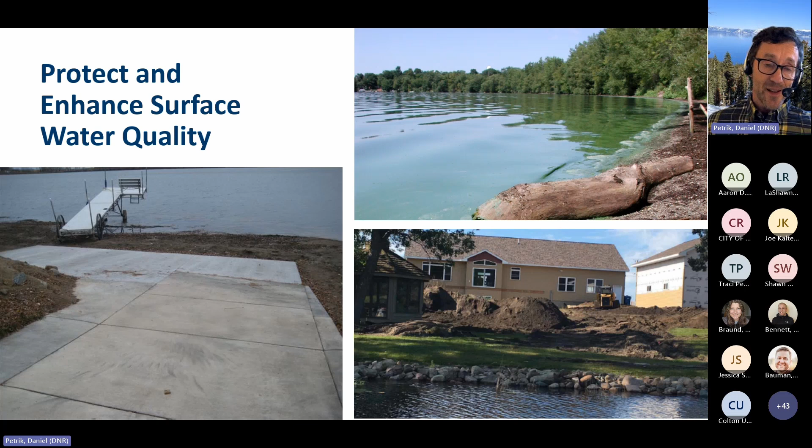Another key purpose for the Act was the preservation of economic values. Property values can vary tremendously depending on a variety of things such as density, construction quality, neighborhood character, and other qualities unique to a property's location.

The shoreland minimum lot size standards were designed to maintain property values consistent with typical urban and rural residential standards and to prevent very high density that would both degrade lake shores and ultimately property values.

Also, keeping structures and septic systems away from bluffs and rivers is especially important in parts of the state with highly erodible soils and meandering rivers, as we can see here. A key part of preserving economic values as well as public safety, especially with increasing amounts of extreme rainfall events, is keeping structures away from the water.

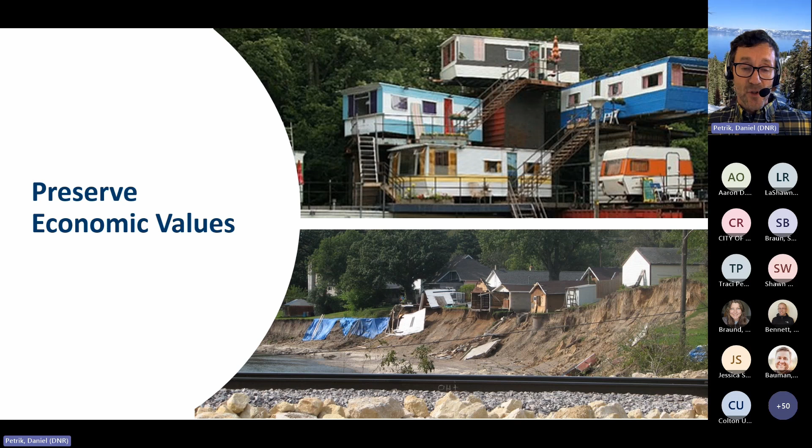I just want to note though that the minimum structure and bluff setback standards that were developed in the 1989 rules didn't consider the extreme rain events and river movements that we're seeing today. So communities should proactively look at these standards for relevance in their community, and many communities have adopted more strict standards to protect properties from these risks.

Shoreland standards for lot area, structure setback, impervious surface, and land alteration all work together to minimize the movement of sediment and phosphorus into lakes, preserving both economic and water quality values. There's growing evidence that water quality affects property values, at least in rural areas. A Bemidji State study showed that a 3-foot decrease in water clarity leads to a 22% decline in property value. So there's some real strong economic merit to protecting water quality.

And finally, the last goal of the 1969 Act is the preservation of natural environmental values and the wise use of water. This is a balancing act between unfettered development and development that sustains clean water, habitat, and scenic value—a balancing act state regulators often refer to.

This is a difficult task, but one important concept here is scenic character. While this concept can vary from person to person and across the state, and is difficult to define, most people know it when we lose it. It's sometimes hard to know when you're losing it because it happens in slow, incremental steps, and it's often hard to detect. But once we lose it, it's impossible to get it back.

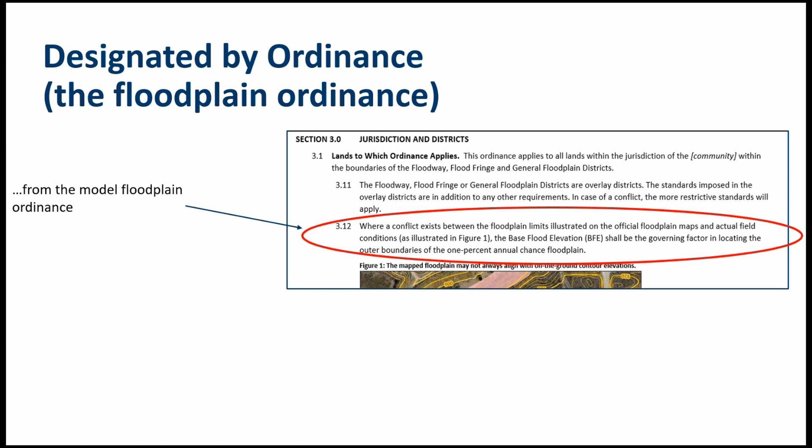The language in a floodplain ordinance that the shoreland definition refers to often looks like this phrase from the floodplain model ordinance. Here, the language states that if there's a conflict between the floodplain maps and the location of the base flood elevation, or BFE, based on field conditions, the BFE is the governing factor in locating the floodplain boundaries. This is an important issue for communities still working with old, inaccurate floodplain maps. In these situations, the geographic reach of the floodplain ordinance actually follows the 100-year floodplain elevation rather than what's shown on the map. This illustrates the issue.

In this area, we only have a piece of land that's partially in the shoreland district, as you can see from the 300-foot buffer from the creek in the lower part of this photo. This area isn't in the mapped floodplain, but most of it is in the floodplain because it's below the 100-year flood elevation and hydrologically connected to the stream. You can see this blue pipe that goes underneath the road connecting the stream to this low-lying piece of land. So the boundaries of the shoreland district don't necessarily stop at 300 feet from the creek - it includes all this area in light blue, and in this area shoreland standards would apply for any development.

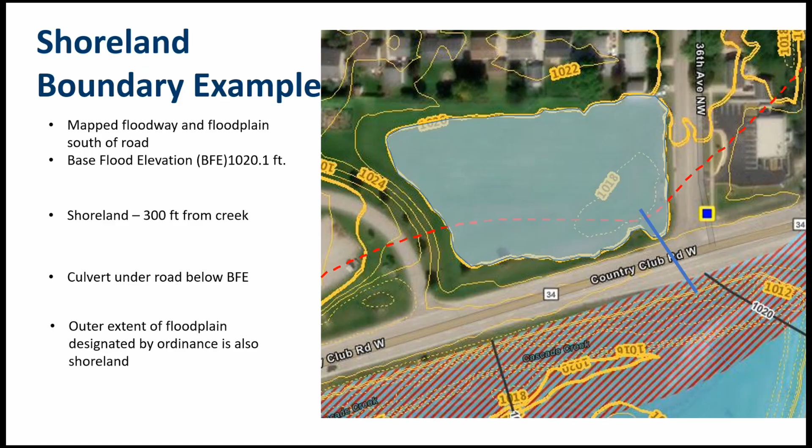Moving on, another important element in shoreland regulations is the idea of water body classifications. All public water lakes and streams are classified, and that classification determines key development standards such as minimum lot size and width or setback standards. A key concept here is that bigger and deeper lakes and rivers can better sustain human impacts of runoff, sedimentation, and nutrient loading.

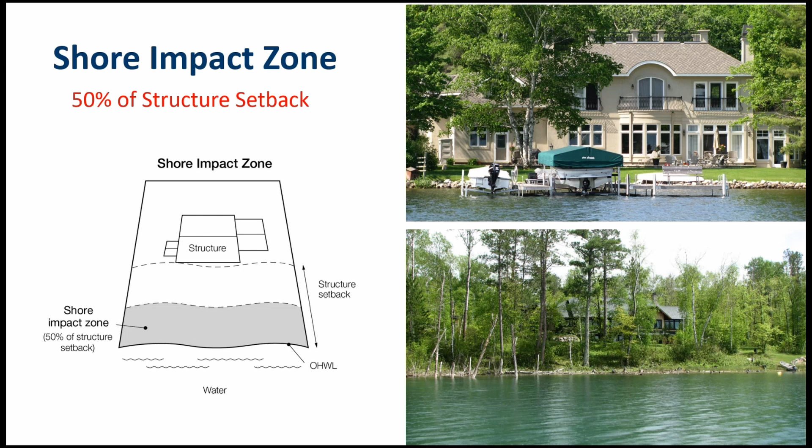The last two slides in this section cover the two most sensitive shoreland areas. Shore impact zone, or SIZ, is the first. The shore impact zone is always 50% of the structure setback, so it can vary depending on the lake or river classification. You can think of it as a buffer zone that should be kept natural to provide room for vegetation, natural stormwater management, habitat, and to preserve lake character. This works to keep most development activity away from the shore to help reduce the risk of erosion.

The bluff impact zone is the other area where intensive vegetation removal is prohibited and where a permit is required for land alteration of more than 10 cubic yards. You can think of it as a bluff plus a 20-foot buffer along the top of the bluff. It's a little of an odd concept, but it's not only the bluff itself, but 20 feet from the top of the bluff.

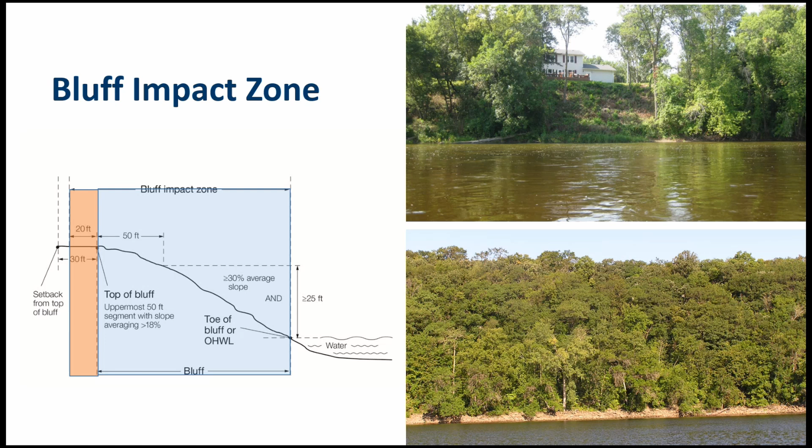Let's move on and talk about some key standards in all shoreland ordinances. As mentioned earlier, these standards vary with water body classification. These tables from our model ordinance simply illustrate the wide variety of permutations you can have based on classification, represented by different colors, also by whether there is a sewer or septic system used on the site, and whether the lot is riparian or non-riparian.

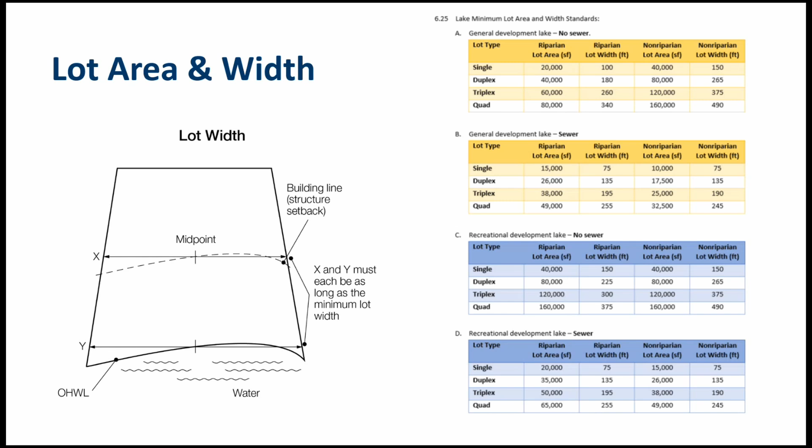So just to show you the range that can be expected: a single family home on a riparian lot connected to a city sewer system, the minimum lot size could range anywhere from 15,000 square feet on a general development lake to 40,000 square feet on a very sensitive natural environment lake.

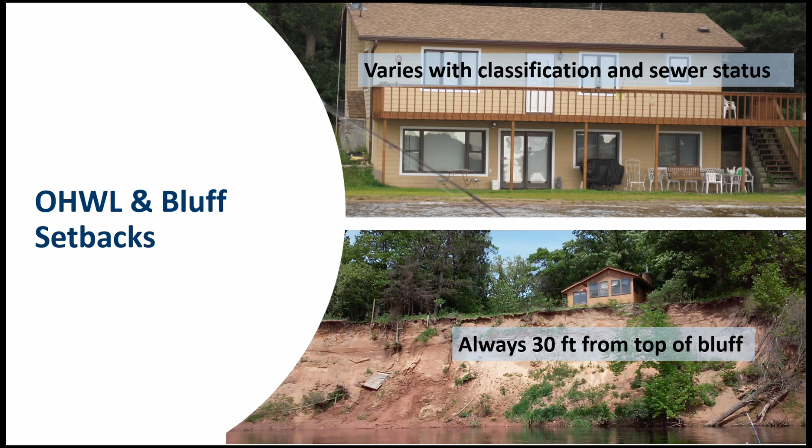Lot size standards and the ordinary high water level structure setback vary based on classification and sewer type. Bluff setbacks from the top of the bluff are always 30 feet everywhere in shoreland. The shoreland rules also limit the amount of impervious surface to 25% on each lot.

Surface water runoff is the second biggest source of nutrient pollution after sewage effluent, and it carries road salt, goose poop, lawn fertilizers, and dirt. There's a lot of phosphorus in dirt and sediment.

But this standard isn't intended just to protect water quality. It also serves to limit the amount of hard surfaces in the nearshore area so that there's room for vegetation and the habitat that provides places to live for critters. It also provides that elusive lakeshore character, which many people appreciate. So while providing natural stormwater management, this green space also provides a lot of other benefits.

Because of all these purposes for restricting impervious surface, the DNR doesn't favor changes to this standard or the use of permeable pavement. We understand permeable pavement is a valid stormwater management practice, but it's still a hard surface and it doesn't allow this green function to occur in nearshore areas.

I see Christy asked about city sewer systems. She's wondering if sewer could also mean a community sewer system or cluster septic system. Yes, we would include that sort of approach to interpretation in rural areas.

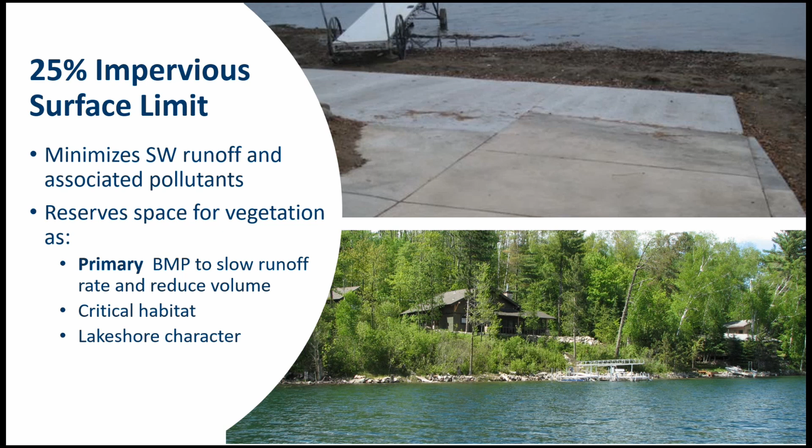One of our last topics in this area is vegetation management. The shoreland rules prohibit intensive clearing in the shore impact or bluff impact zone and on steep slopes. However, limited clearing is allowed for a wide variety of uses that are laid out in your ordinance and listed here. We certainly understand that this is probably the most difficult standard in the shoreland ordinance to administer.

Many of you have thousands of miles of shoreland and shoreline to monitor, so it's very difficult to monitor what's going on all over the place on this account. But this is an area where many communities are taking stronger action, and there's lots of opportunities here.

Some communities are requiring restoration when violations are found, requiring restoration as a condition of some permits, and quantifying where and how much vegetation can be cut. That's in response to the fact that the shoreland rules are pretty vague about what can be selectively cut.

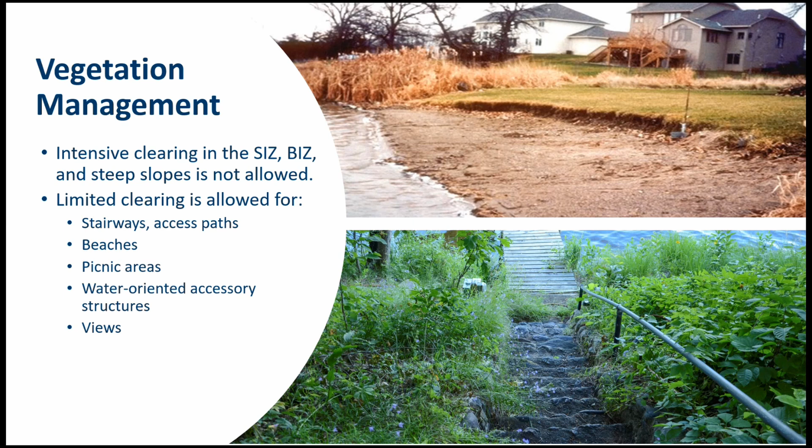We'll be talking about these kinds of higher standards and more at our March 13th training on higher standards. So if you're interested in that, please come back on March 13th.

One of the last areas here again is about land alteration, and the shoreland ordinance has a permit requirement for disturbances exceeding the thresholds shown on screen, but this is an area where communities can also do a little bit more when you attach conditions to land alteration.

The shoreland rules certainly encourage you to assess impacts to wetlands, to use BMPs for managing sediment flow, keep it in place, and follow design specifications for riprap.

When it comes to riprap, the rules do have specific standards. They're illustrated in the graphic here and are also in your ordinance. This is one of the areas where local standards overlap DNR jurisdiction for work in public waters.

The DNR public water rules allow the placement of riprap only when there's a demonstrated erosion problem, and riprap is not allowed for aesthetic reasons. Boulder walls are also not considered riprap.

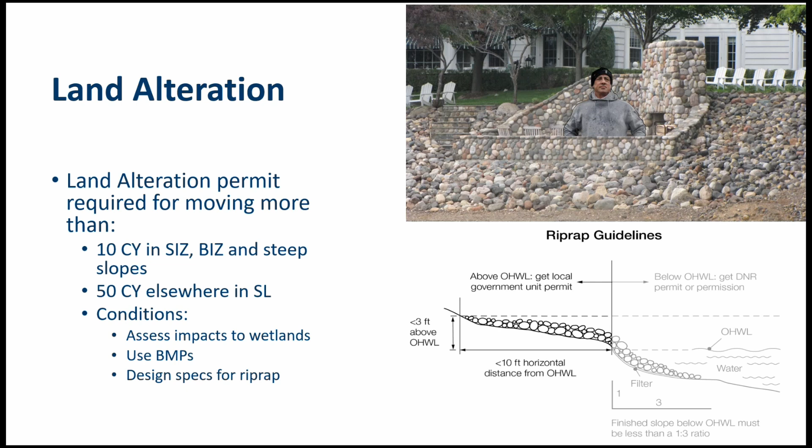Your ordinance doesn't have those standards, but if a riprap project is below the ordinary high water level, then the more restrictive DNR standards apply. This is a hard thing to enforce unless there's some good coordination between the local government and the DNR. So if you're aware of any project like this and think there's an opportunity for potential impacts, it's always helpful to connect with your local area hydrologist.

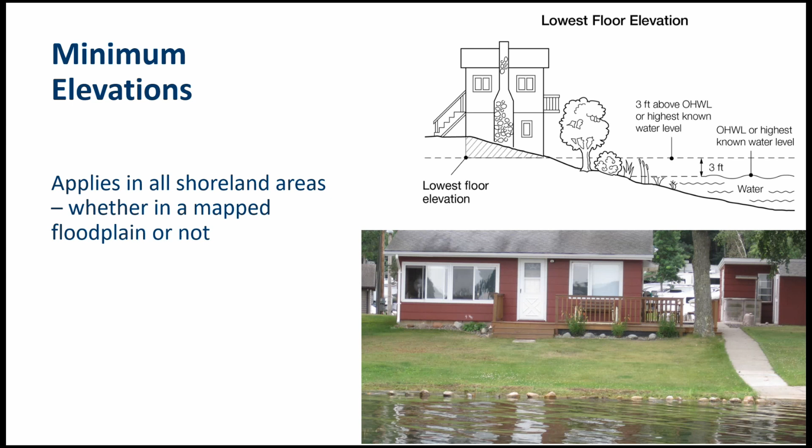The last standard we're covering here is minimum structure elevations. These are intended to reduce flood risk, and they always apply in shoreland. Where there are mapped floodplains with official flood elevations, those elevations are used. But in situations where they don't exist, we use the minimum elevations in the shoreland ordinance, which requires that the lowest floor be at least 3 feet above the ordinary high water level or the highest known water level, whichever is higher.

All right, so any questions before we move on to special topics here? All right, well, let's move on.

The first topic is the Shoreland PUD. This is often a confusing topic because it's frankly a really bad name. But there are two types. The first one, which we refer to as a commercial PUD, refers to transient lodging facilities such as resorts, campgrounds, and hotels.

It doesn't apply to restaurants, office buildings, shopping malls, or any other type of commercial development. The residential PUD is just what it sounds like.

It's a development method for any type of permanent housing, whether single family, townhome, or apartments. In both cases, the PUD label is misleading. These are not PUDs in the traditional sense where a PUD is a negotiated development.

The Shoreland PUD is a conditional use to allow higher intensity development in the shoreland, as long as specified performance standards in the ordinance are met. So it's not a negotiated deal, it's a CUP that has very specific standards.

Just as a side note, in order to work with the shoreland residential PUD, there have to be at least 5 units in the development. For any type of PUD, commercial or residential, there are 4 steps. In both types, the result of this design evaluation process is a determination of the number of units allowed. On the screen here is an example of a residential development.

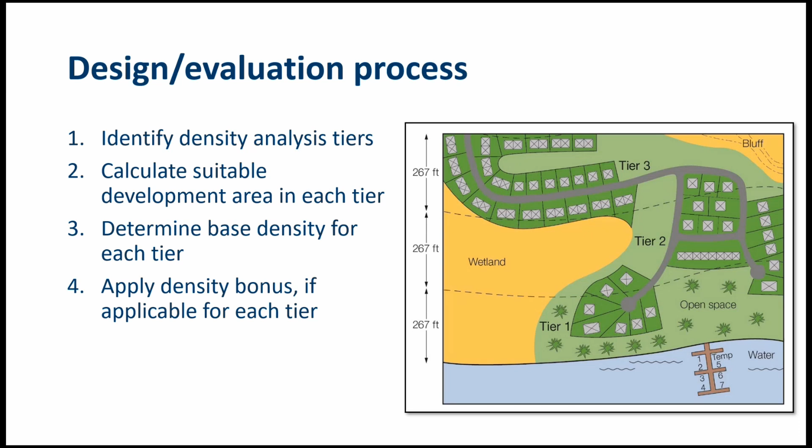So I'm going to illustrate how this could work for a commercial PUD. In this case, we have an RV campground example. We have 60 proposed units or pads in 2 tiers, the blue tier and the green tier. Nothing's proposed in the tan, or third, tier.

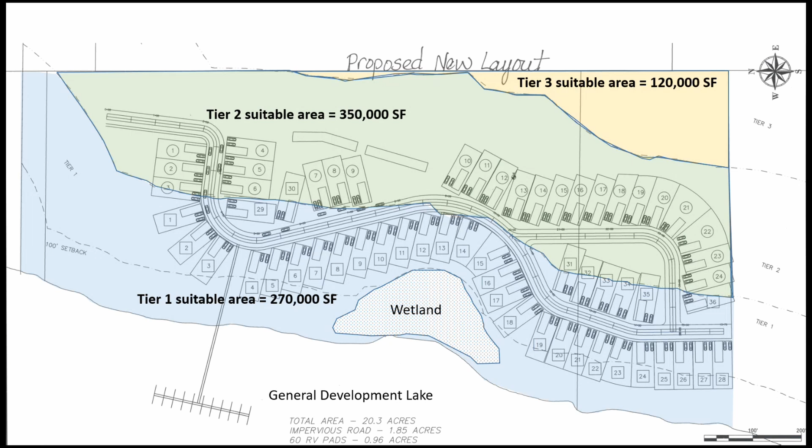In this example, we've already subtracted out the wetland area in tier 1, so that the suitable area we're showing at 270,000 square feet has already taken out the wetland area. This is the net suitable area on which we can calculate density. We also have the suitable area calculated for the other 2 tiers, just for your information.

So calculating the number of units in a commercial PUD is a bit complicated, and I hope my process works for you, so please bear with me. One thing you should understand is that the formula in your ordinance is designed to relate the unit size...

...of, say, the hotel unit, room unit, the cabin size, or the campsite size. It relates the size of those units with the number of allowable units in total, so that the larger the average unit size, the fewer units you get. This relationship is intended to recognize that occupants of larger units - a cabin at a resort or a very large campsite - tend to more intensely use lakes and shoreline areas than people who maybe just go to a hotel for a conference or a convention. That's why the formulas are designed the way they are.

While not explicit, your ordinance contains this formula for calculating the number of units, and this is the formula you'll use for calculating density in each tier. The formula starts with the suitable area, which is then multiplied by the floor area ratio, which is in this table in your ordinance. In this case, you would multiply the suitable area times the floor area ratio, which is one of these factors, to get total floor area.

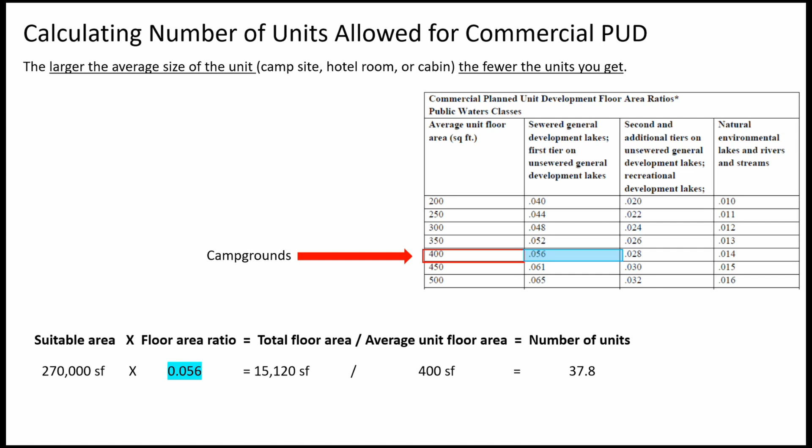Thanks for working through this with me. This is what a spreadsheet would look like for all 3 tiers after you've done these calculations.

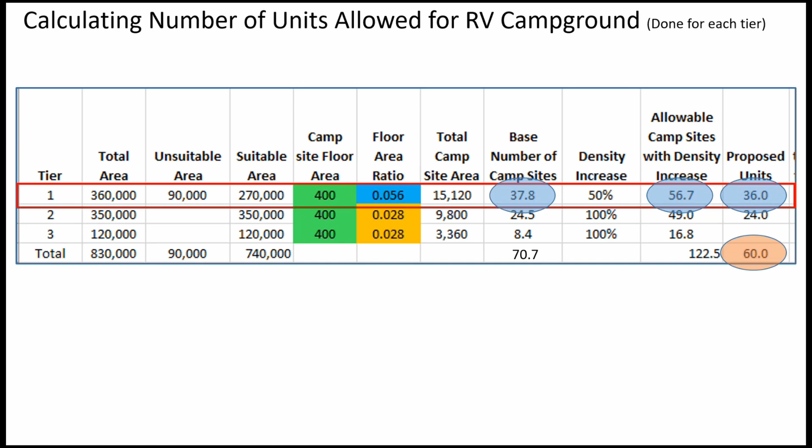The analysis for the first tier should look familiar, we just did that. We can see there's 37.8 units allowed, compared to up to 57 units you could get if you applied density, though in this case there was no request for density. The developer is proposing 36 units, which is less than the number of allowed units, for a total of 60 units, which is 10 units less than the base units allowed under the base number of campsites column. So in a nutshell, that's how this is done.

To get to that 50%, at least for a residential development, 70% of the land within the shore impact zone has to be classified as open space, and 50% of the shore impact zone of a commercial PUD has to be considered open space.

Once you do that, you need to figure out how much more you need to meet the total 50% standard. And then if you can't, you have to find that remaining percentage elsewhere on the project site.

Other key standards include a requirement that all recreational facilities, such as beaches and mooring spaces, need to be centralized in one location to minimize impacts to the riparian edge.

One of the more difficult challenges is that the number of mooring spaces is limited to the number of units you calculate and are allowed in the first tier.

A little known fact is that the DNR must approve shoreland PUDs for local governments without DNR-approved shoreland PUD standards. These PUD standards and rules are optional, because many communities simply don't want to allow this sort of density in their community.

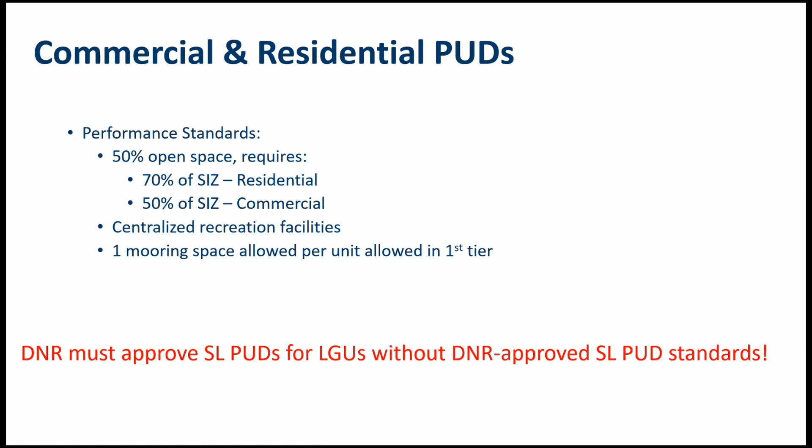There are no incentives in the shoreland rules as an incentive to develop less. That's why some communities just haven't adopted the standards. But a number of communities have changed the standards so they get less, and that's probably the more direct route to go. If a community doesn't want this kind of intensity, they can change the standards and be more restrictive. If you're interested in that, I suggest you call me up or come to our March training on higher standards. Hope that helps, Joe.

So we're moving on to bluffs, and there's a sequence of events in determining if you have bluffs. The first part of this is looking at your bluff definition, and your bluff definition has 4 parts to it.

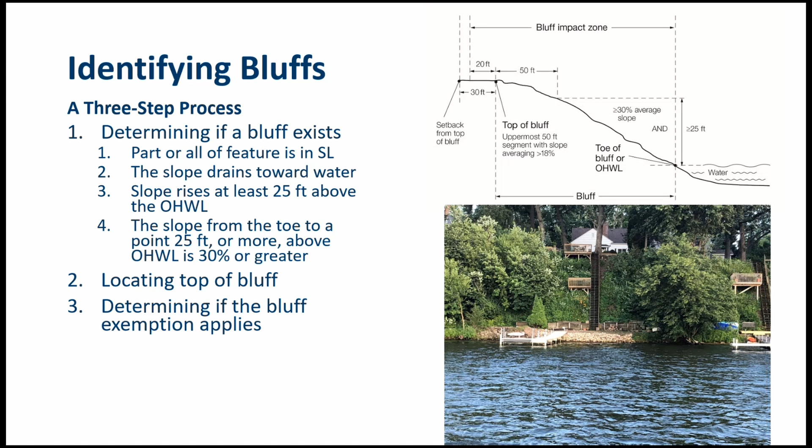Once you determine you have a bluff using that definition, you need to locate the top of the bluff, and then lastly, you would determine if the bluff exemption criteria applies, and we'll walk through this for you. But the important thing to know is that this is a sequential set of criteria. If you're working through the bluff definition, these 4 items here, if one of them is no longer true, then you don't have a bluff and you just stop. So it's a sequential process.

Let's look at the 4 parts to the bluff definition. The first step states that part or all of the feature is located in shoreland. The bluff doesn't have to be completely in shoreland, because you need to consider the entire feature wherever it's located to determine whether it meets the bluff standard criteria. If it does, then only that part of the bluff located in shoreland has to comply with the shoreland bluff standards, but we still need to consider the whole feature to work through the bluff definition.

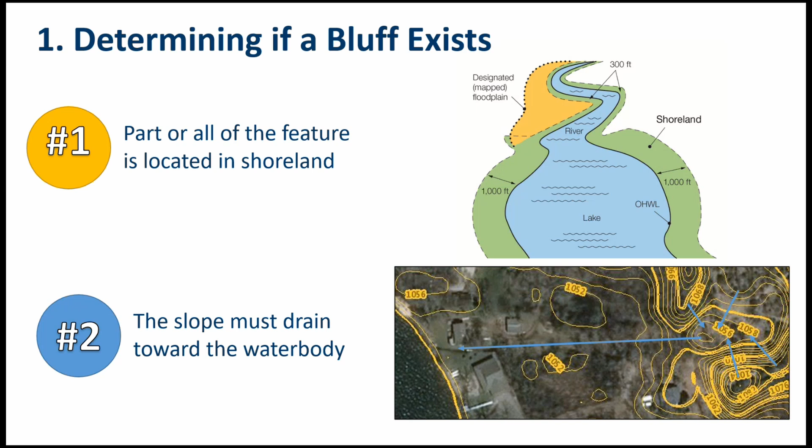The second criterion is the slope must drain towards the water body. This doesn't mean it has to drain directly to or even reach the water. You can see on the graphic here that water is flowing off a series of slopes in different directions, but ultimately the flow of the water is towards the water body. So these features shown in this graphic would be considered a shoreland, or potentially a shoreland bluff, if they're located in shoreland. The next step requires that this slope feature rise at least 25 feet from the ordinary high.

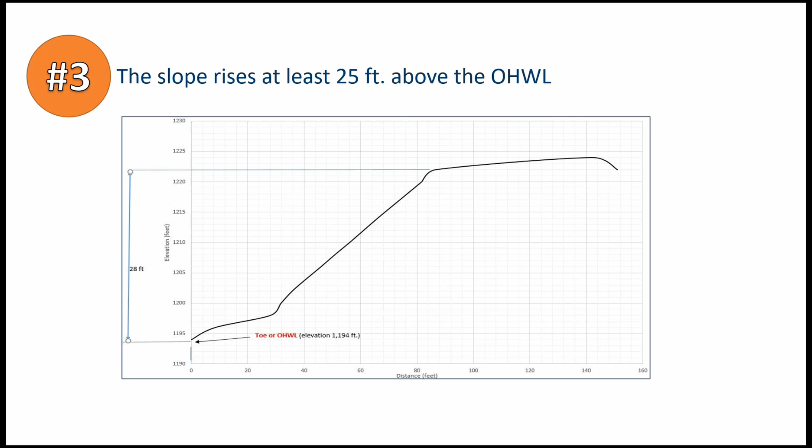Here in this example, we have a slope that rises 28 feet above the ordinary high, so it passes this check. The ordinary high for many lakes can be found through DNR's Lake and Flood Elevation online webpage. It's a great source for finding out a lot of information about lakes, including flood elevations. I'll show you that at the end of this training, so stick around for that. If you can't find the ordinary high or there's no data online for some of our resources, please contact your area hydrologist.

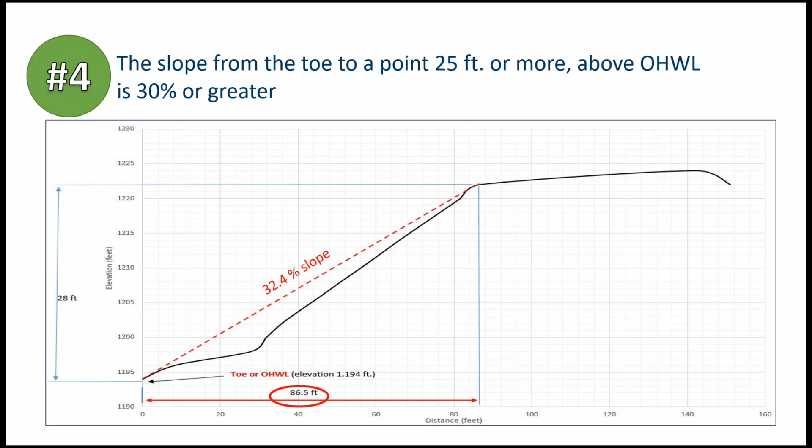And then finally, the last step in the bluff definition asks the question: does the slope from the toe to a point 25 feet or more above the ordinary high achieve a 30% or more slope? In this case, we can see that the slope rises 28 feet over a distance of 86.5 feet, for a slope of 32.4%. So in this case, we have a bluff.

Once you've determined that you have a bluff, you need to find the top of bluff so you know where to start the 30-foot structure setback from the top of bluff. Technically, determining the top of bluff can be tricky if you aren't out in the field with surveying equipment. However, you can do a desktop analysis like I've been showing here, using data downloaded from MnTopo and our bluff profile tool. That's another resource - it's an Excel-based spreadsheet you can use to estimate bluffs and find toe and top of bluffs. We have a bluff guidance document that'll guide you through that process, and I'll show you where that is at the end of this training.

In this graphic here, we can see the top of bluff definition, which is the higher point of a 50-foot segment with an average slope exceeding 18%. I've tried to label that calculation here, showing where the 50-foot segment is and where the top of bluff is, at the 18% plus slope percentage. We're showing the lower end of that 50-foot segment and the upper end, and the slope between those 2 points is just slightly over 18%. So the upper end of that segment is where our top of bluff is, and that's where your structure setback starts.

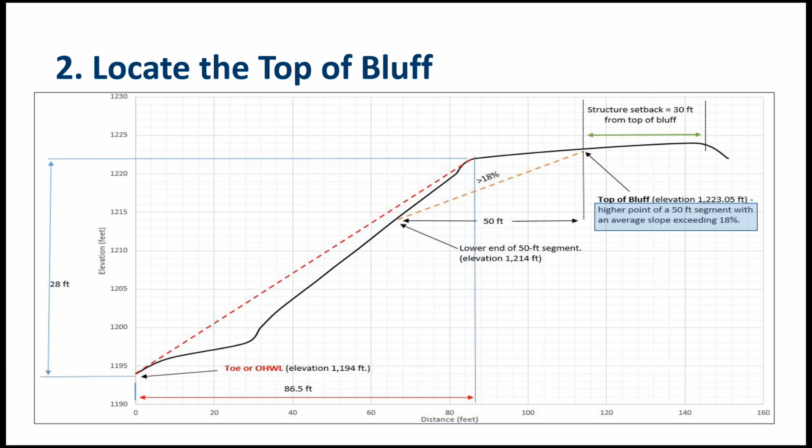The last part of this is to determine if the bluff exemption applies. This provision only applies to bluffs already determined to be bluffs under the criteria we've just walked through. This provision was put into the rules to allow relatively flat plateau areas between tiered bluffs to be buildable if structures can meet setback standards. This situation is very rare, but you may find this in areas of the state with very large bluff complexes - a relatively flat area between very steep slopes on which you can build.

This is important to be aware of. A number of property owners and some surveyors are confused about this and will confuse this exemption language with the toe and top of bluff language. These definitions are very similar in how they're written, so people will confuse them and try to use this language to exclude certain parts of a slope from the bluff, saying because it's excluded, it's no longer a bluff, making it easier to develop. There's a variety of reasons people might do that, but I want you to understand these definitions are written slightly different, and if you apply them as written, you would hopefully not make the mistake of excluding part of a slope feature from a bluff calculation.

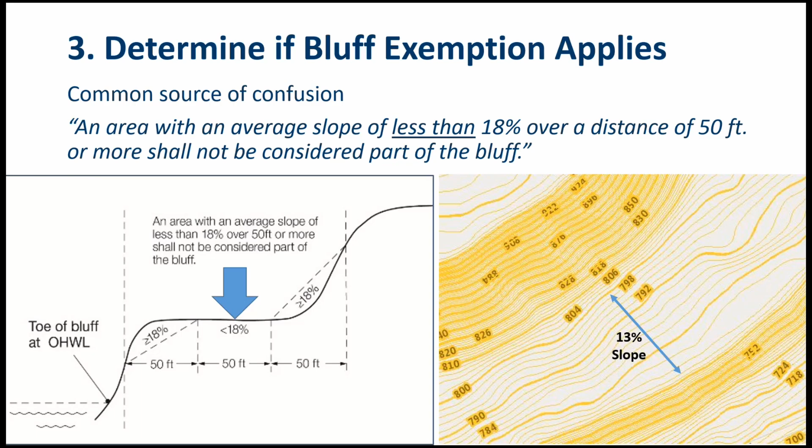Let's see here, environmental review. Last special topic. Many of you don't know there is criteria for environmental review, mandatory review. There are triggers for residential campgrounds and resorts. If someone is proposing more than 15 units in a sensitive shoreland, that's an environmental assessment worksheet trigger. If they're proposing 25 units or more, that's a trigger for a non-sensitive shoreland.

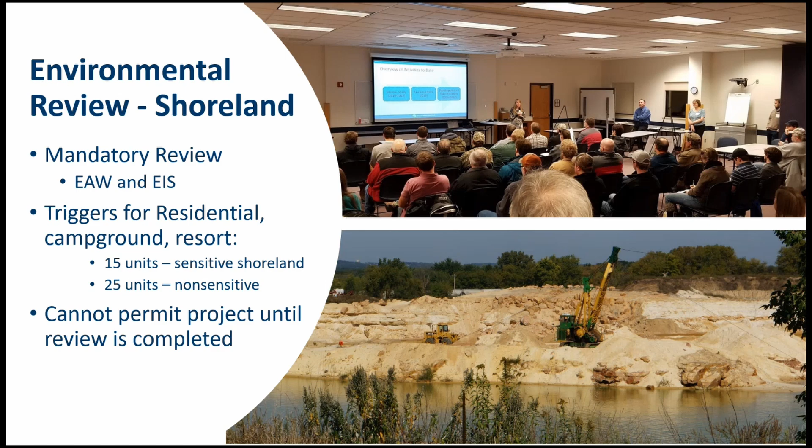People wonder, what is a sensitive shoreland? The EQB has definitions for this. These are not DNR definitions, these are EQB definitions. But the most common one you'll find is a natural environment lake. So if you're seeing a development application come in for a resort, campground, or housing development on a natural environment lake, pay attention to the number of units and then look at the EQB rules to see if environmental review is needed.

So with that, we're just going to go through some housekeeping things with our administration. On our webpage, we have a model ordinance. We're continually updating that based on comments we get back. This model is consistent with the 1989 rules. It's just been rewritten from the original model ordinance. It uses more bullets and numbers, it's easier to find things, it's more concise and uses a lot of graphics. The version with commentary gives a play-by-play explanation of why we have certain provisions and what they mean. So if you're confused about even administering an existing ordinance, look up our model and the commentary version of that, and we may have some answers to your questions in there.

We also have a review process. Whenever you adopt or amend an ordinance, we have this process on our webpage. We have a pretty extensive process from step 1, notifying us, to step 5, adopting the ordinance. But if you're just seeking conditional approval, and it's a pretty standard approval process, you can start with step 3 - that's explained on our website. But we do like you to follow this. This process helps us keep track and respond to you in a timely fashion and avoid dropped balls. So we appreciate both you working through this as well as ourselves, and hopefully this makes everybody's job easier.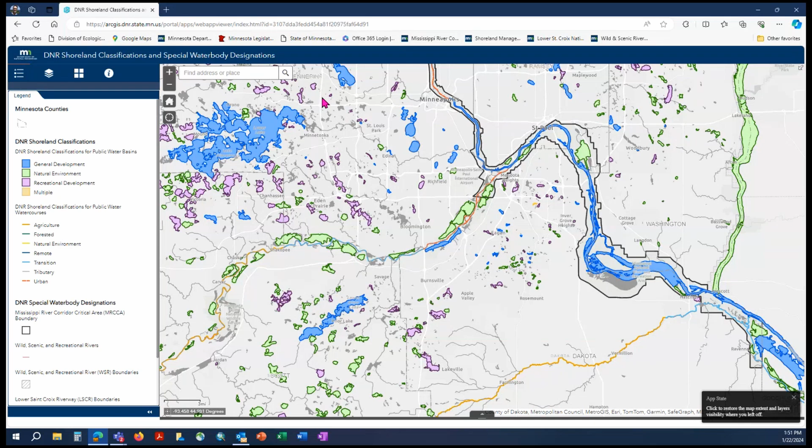Dan, I'm not seeing any questions in the chat. I will share that in addition to DNR's Lake and Flood Elevation Online link, I also added a link to Lake Finder, on our DNR website. It's another good source for finding OHW and other lake level information.

Sorry, Gary, there are some questions coming in. Go ahead. Yeah, I just saw Aaron had a question. He asked how many times could a top of bluff setback be applied along the same slope? Could a 30-foot setback apply multiple times in a plateau situation where it becomes less than an 18% slope, and then once again at the traditional top when it tapers off to less than 18%?

Yes, you could. That's in these areas I was talking about earlier, we often see around rivers, the Minnesota or the St. Croix. You'll see in a few places on the Mississippi very large bluff complexes where a bluff rises, tapers off, and rises again. So in those situations, you could definitely see multiple bluffs and multiple tops of bluffs.

And Christy was asking a follow-up to the bluff question: do you apply top of bluff setbacks to plateaus? Yes, you would. For example, if you had a bluff rising up from a river and then it flattened out, and at another distance it started rising again, at that plateau after the first rise, you would apply a top of bluff setback. And if there was room to meet the setback, you could build at that location.